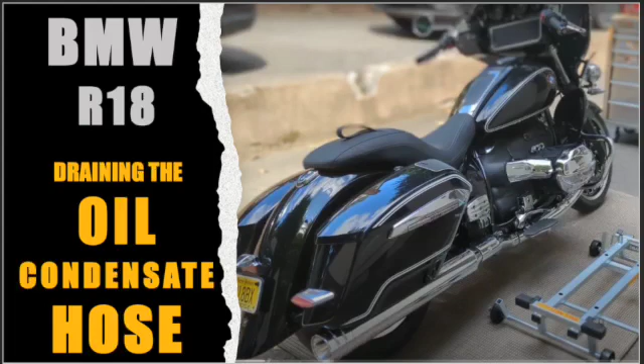I would say it's probably best to do this during the engine oil and oil filter change. So if you look at the bullet items, there's draining the oil condensate hose.

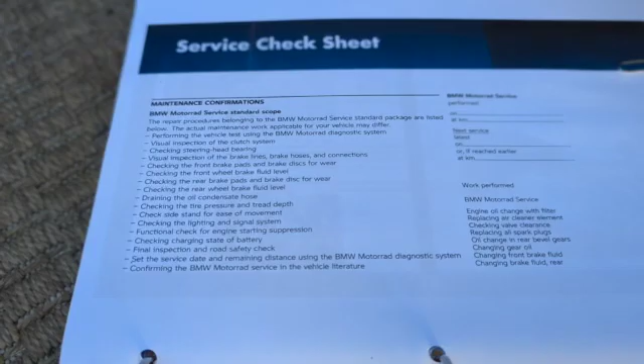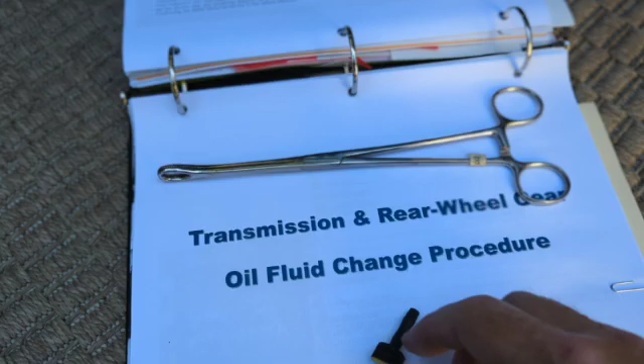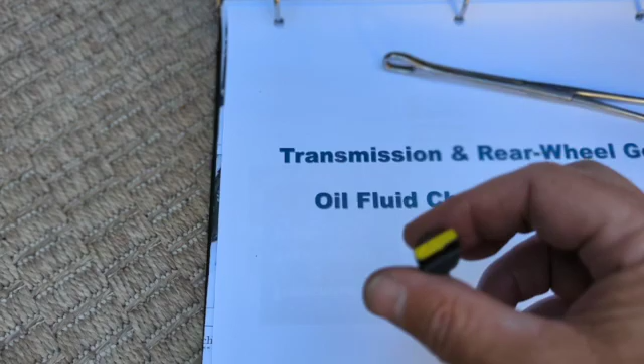The way I went about grabbing that hose or plug, I grabbed forceps and was able to grab the hose, then kind of used my hand to grab the plug itself. I painted it yellow and marked it so that when I get underneath the bike, you folks will be able to see exactly what I'm talking about. I went ahead and pulled the drain, and as you can see, nothing dripped out. So I'd say we could check this off as being completed.

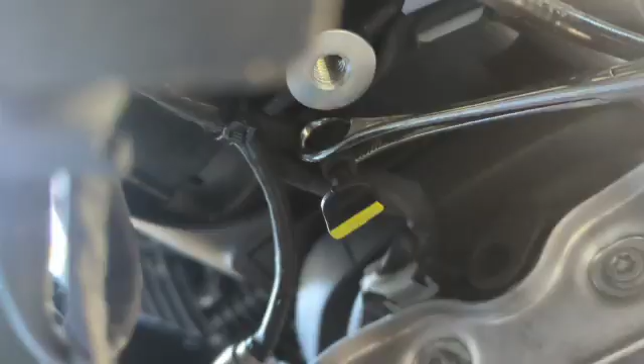All right folks, so draining the oil condensate hose. I used a pair of medical forceps, and you can see I marked it in yellow just for purposes of the video, so everyone gets a feel for where this is located. It's definitely behind the engine block as you move back towards the bike.

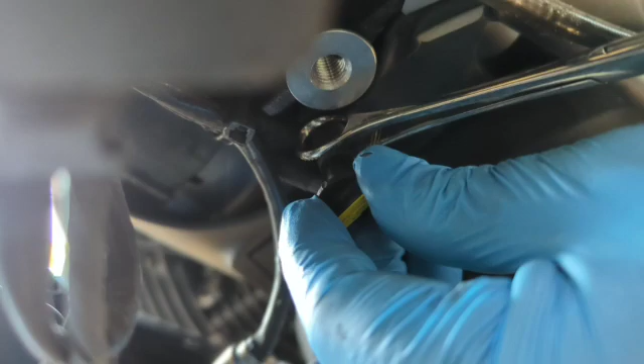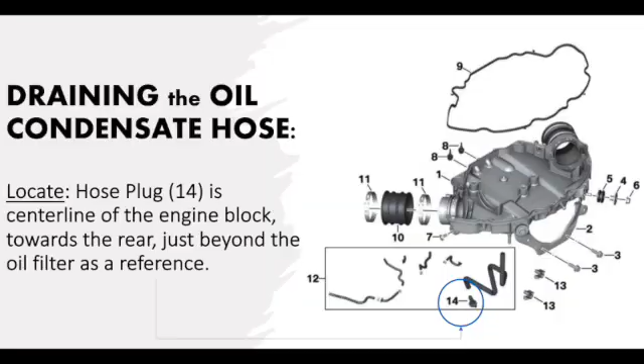I used the forceps to grab the hose, and I'm basically twisting and pulling at the same time to pull out this plug. As you can see, nothing drained out, but it is part of the service interval, so I figured let me go ahead and at least check that.

So I'm going to go ahead and reinsert it and check that off on my maintenance. I guess this could be done during the oil change - that's probably best. Again, I don't even know, maybe even the oil fill plug might be preventing any oil that's inside the hose from actually draining out.

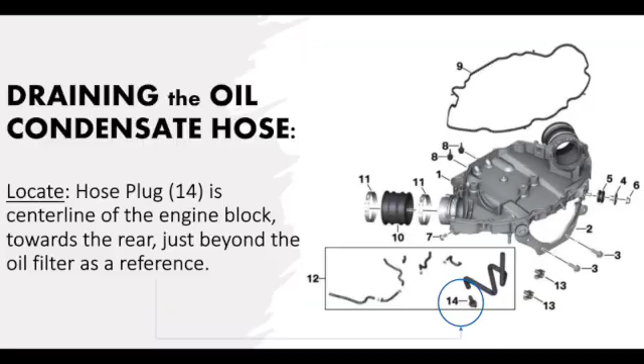So that's it for the oil condensate hose. I'll add it to the engine oil and filter change. Good luck, I hope this helps.